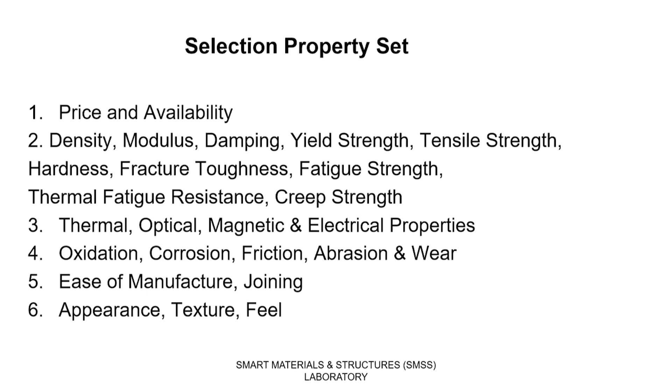Every product is going to interact with the environment for which it is designed, which means there are chances of oxidation, corrosion, friction, abrasion and wear. So we have to choose materials such that these interactions with nature, or these kinds of abrasive forces that work on a product because of natural forces, can be minimized.

And then of course, when we have to make a product, we have to think of the manufacturing process. So the ease of manufacture and joining becomes an important factor.

Finally, it is the appearance, the texture, the feel of the product that actually tempts us as a customer to buy a product. So while choosing the material, we have to keep that point also in mind - what is the aesthetic property of a particular material and how it is matching with the product.

So one by one we will go inside the story. The first important point is that we have to be aware of the different classes of materials. The very first important class is metals and alloys, and there the most important group that has been used for centuries is iron and steels - old hand.

Then of course, the ones that are coming up very popular - aluminum and alloys, then copper and alloys, nickel and its alloys, and of course, with biomedical devices and biomechanical applications, prosthetics, as well as for spacecrafts, rockets, etc., titanium and alloys. So this is one major group of materials that we have to consider.

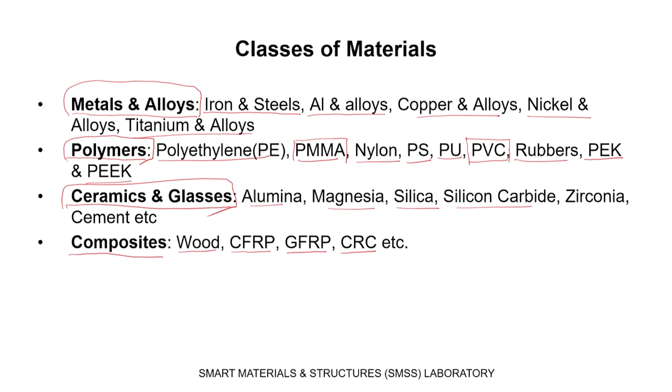So these four groups are the broad classes of materials we have to keep in mind when we select materials for mechanical design. Now, when we talk about the selection process, the first important thing to keep in mind is that, like us, we have many features in our personality. When you write your CV, you put all those features. Like that, every material has certain attributes, what we call characteristic properties: density, strength, cost, etc.

Design, on the other hand, when we are designing a product, demands a profile. That means I need such and such density, let's say low density qualitatively, high strength, less expensive, etc. And I need to look into the materials and select all the materials that match this profile. That is how we start, and then we apply the property limits, because you said low density—how low? Is it between 1000 to 2000 kg per meter cube? If that is so, then immediately steel is ruled out, iron is ruled out. That is how we apply the property limits depending on exactly what is the maximum or minimum permissible property of the system.

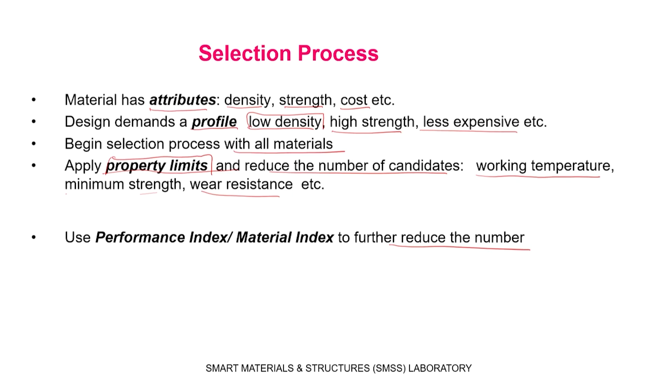So even if we start with a large group of materials, this will help us reduce the number of candidates. There are typical properties generally applied, like working temperature, strength, wear resistance, etc. Finally, we will utilize the performance index or material index to further reduce the number to one or two. That is the trick we will learn today. But before that, I also want to show you how complex the selection of material process can be.

Just consider one material I told you is very popular today: aluminum and its alloys. Aluminum and its alloys actually have 7 to 8 series. For example, the 1000 series, which is nothing but pure aluminum, 99% pure. They are ductile and generally used as electricity conductors or as foils, like the aluminum foil we utilize. On the other hand, the 2000 series aluminum has a percentage of copper mixed with it; it is much stronger than pure aluminum and is used in aircraft skin, rivets, etc.

If you go for the 3000 series, that generally comes with the mixing of manganese. Manganese gives it corrosion resistance, so it is used for roofing sheets, cooking pans, etc. If you go for the 5000 series, that is aluminum plus magnesium, and magnesium gives it even more strength than copper.

So, it is used in pressure vessels. Then if you go for 6000 series, you get not only aluminum and magnesium, but also silicon. So, it is used in stronger applications like window frames, age hardened products, etc. 7000 series again gives you strength, age hardening, and all these things together, that is with the zinc.

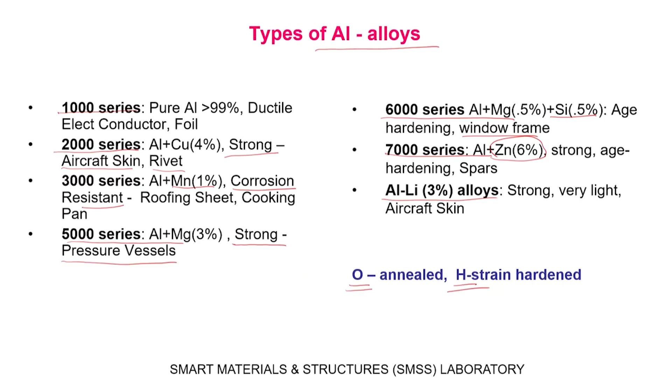So, let us say that I have to choose a particular variety of aluminum for automobiles. We know that a light automobile is something that we always look for. So, how do we choose it?

Well, first of all, I choose a material because it is for a product. Then which family do I have to choose? Ceramics, glasses, metals, polymers, elastomers, composites. We apply the property limit, and then we naturally see that the strength requirement and all these things will keep the metals and the composites as two candidates.

But composites, till today, other than aircraft applications, are very expensive for automobiles. So, except certain parts of a racing car, we normally do not go for composites. So, we will keep ourselves in the metallic domain, and as we are looking for lighter density, lighter automobile, out of all the possibilities of the classes of metals, we would be ready to take aluminum alloys.

Now, as I just told you, aluminum has all these varieties in it. The variety that we will go for is the 5000 variety. Why? Because it is the 5000 variety which can be used in terms of a thinner skin and also has better corrosional properties, and it has good strength.

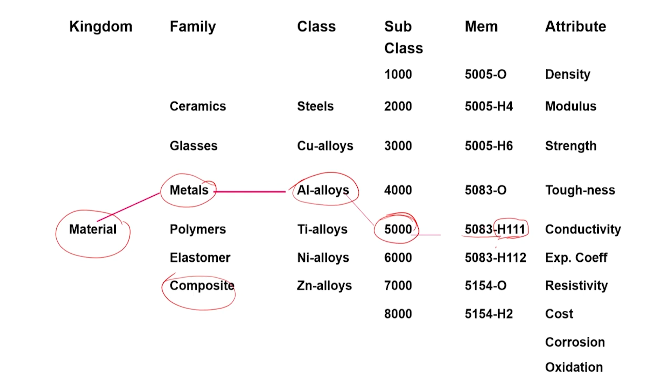In terms of the choice of material, this becomes the final choice. So, this is just to tell you that considering all these attributes that I have given here, one can come to the conclusion that for automobiles, one of the best choices is 5083 H111.

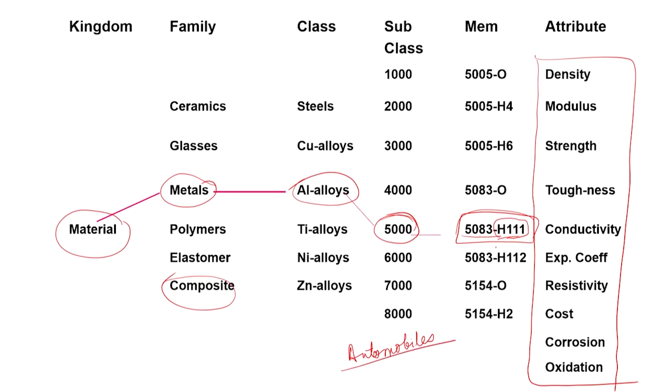Now, let us see what is the process by which we can do this entire thing in a very rational manner. Well, the first important thing is that whenever we design any structural element for a product, it will involve minimization or maximization of an index, and this index property is a function of three things: F is the functional requirement, G is the geometric requirement, and M is the material requirement.

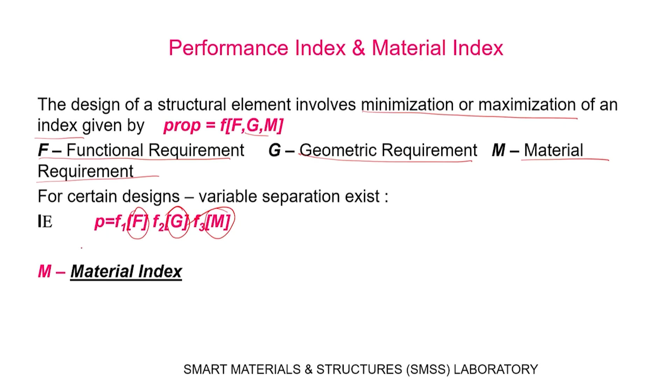And for certain designs, luckily not for all designs, towards the end I will show you how these things can get coupled, but for certain designs, luckily, the separation exists. That means you can consider the functional properties separately, geometric properties separately, and material property index separately. Now, for material choice, we will go for this material index specifically. So, let us see how we can do that further.

I will first give you a very simple example. The example is for a light stiff tie. What is a light stiff tie? Well, what is a tie? Tie is not the same tie that we put in a knot.

In terms of a structural engineer, a tie member is something which is always designed to carry the tensile load, so there is tensile force. So, if I take this member and make sure that I am only pulling it always, then this becomes a tie member. So, let us say I am trying to design a tie member, but it has to be stiff. What does that mean as stiff?

It must have a very high modulus of elasticity, and also it has to be light, meaning it must have a very low density. So that is what we are looking for.

So what is the mass of the tie? M is area of cross section, length and density, product of the three. We need to minimize this mass, that is my performance index. In order to get a light stiff tie, we need to minimize the mass.

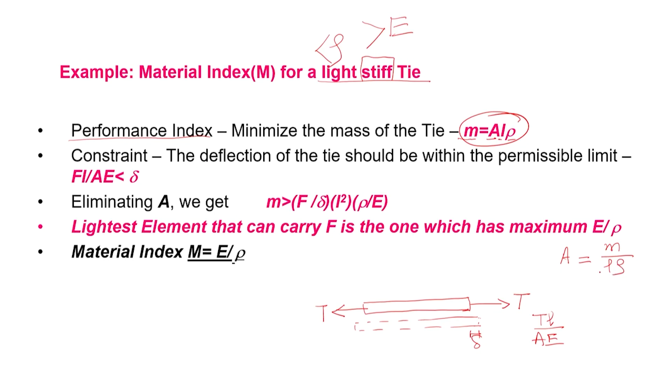So that means area from this relationship can be written as M by L rho - area is that free variable. Now I also know that delta is given to us. So delta is T L by A E, and delta is fixed for us. So what is the area then in terms of delta? It is nothing but T L by E delta.

So now if I write it in this relationship, what do I get? T L by E delta would become equal to M by rho L, that is M by L rho. So I can write this now as: the mass is T L square rho by E delta.

And I can write this in terms of 3 different sets. This T by delta is something we can consider separately as one group - that is the functional group. Then we can write L square as the geometry group, and rho over E as the last group, which is the material property group.

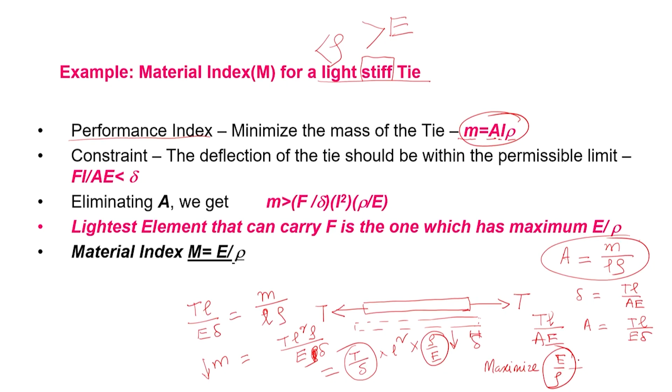So if I have to minimize the mass, what does that mean? It means I have to minimize rho over E, and that means you have to maximize E by rho, because maximization of E by rho is the same as minimization of rho by E. So this example tells us how to figure out the material property index. In this case, it is M is E over rho. Now this is provided you consider area as the free variable.

Now for a beam which can take bending moment, not a tie, this would become square root of E by rho if you consider area only as a free variable. It will become E to the power of 1/3 over rho if you consider height - it will become E by rho. Similarly, from the strength point of view, a material property index is sigma f to the 3/2 divided by rho. And if I consider a column member, then it is C M A L rho, and the material property index correspondingly is square root of E over Cm rho.

So you can actually find out similar material property indices corresponding to every application, and we can use a book - Ashby's book, Material Selection for Mechanical Design - very effectively.

Even if we do not have all the ideas of mechanical engineering, we can still use this effectively for material selection for mechanical design. There is also software available, but even otherwise the book itself is very helpful.

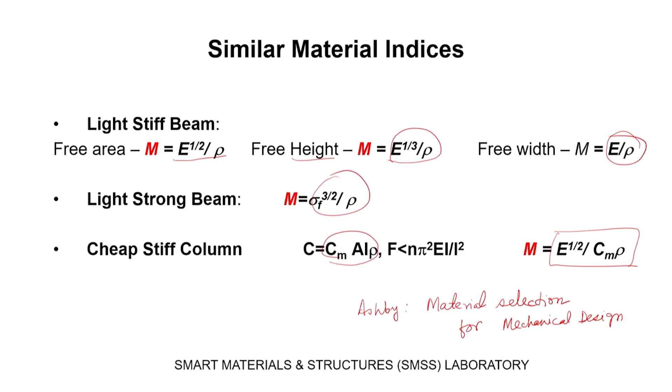Now, let us take some case studies. First case study is related to our aluminum alloy vehicle body material selection. Let us look into this case study.

By the way, this is one of the designs that our students developed for automobiles which can be parked one against the other. Now, one important thing in automobile design we have to keep in mind is that way back in 1975, there was a CAFE regulation that actually restricts fuel emission from the obnoxious emissions and pollution point of view, from 14 mpg to 28 mpg between 1974 to 1987, and the CAFE limit remains 27.5.

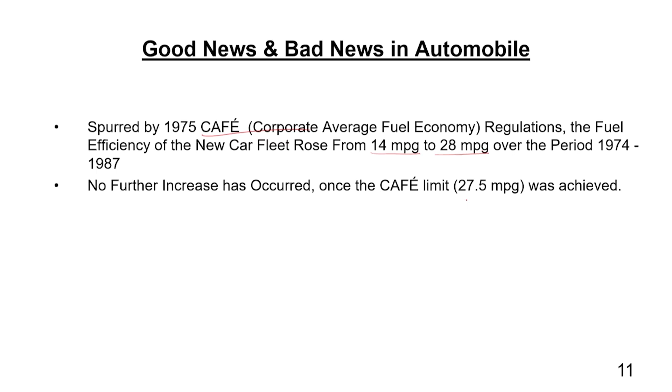So every automobile is to be designed such that you have a good powertrain for efficient power transmission. You have to select the material of the car body such that it is lightweight, such as aluminum alloy, with the most efficient design, carrying out some structural optimization, and fuels with less noxious exhaust. There was also a shift to make smaller cars. That is how the fuel economy was achieved.

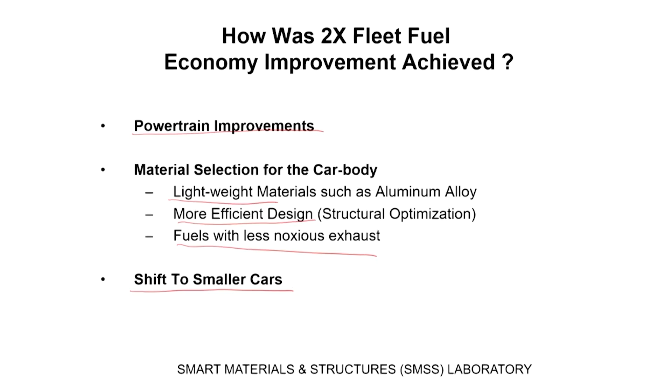Now, if I look at this from a material index point of view, let us take a flat panel. If I take a circular panel, then I can write the mass as pi a squared t rho, where 2a is the diameter of the panel.

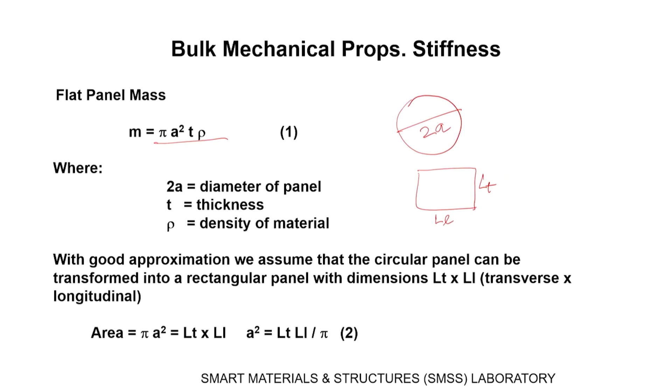The question now will be, what is the deflection? This is why we had chosen a circular panel, for which a nice closed form relationship exists that gives us the deflection with respect to the force.

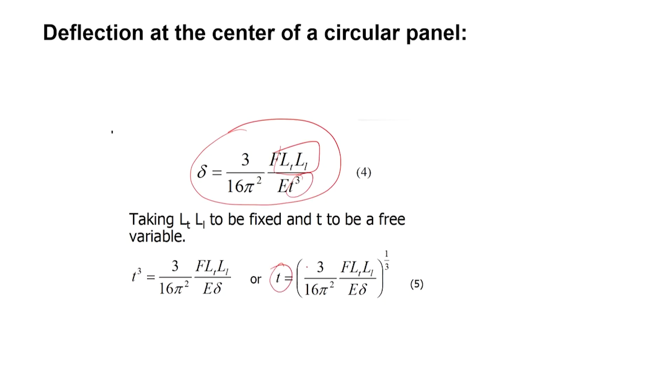Now, LT and LL, the size of the panel, is actually fixed. So I can express the only free variable, thickness, in terms of all the other parameters. And if I express thickness in terms of all the other parameters, then I can rewrite the mass of the system.

And then, exactly as we did for that simple tie case, I can divide this entire thing into three parts, out of which this part is functional. We already know this is functional, this is geometry, and this is the material property index, M, which is what in this case?

It is not E by rho, or the square root of E by rho, but it is E to the power 1/3 over rho. So that means in order to minimize the mass, you have to minimize rho over E to the power 1/3, which is equivalent to maximizing E to the power 1/3 over rho. That is the way we generally keep the density in the denominator - this is just a matter of convention. So this is the way you need to minimize.

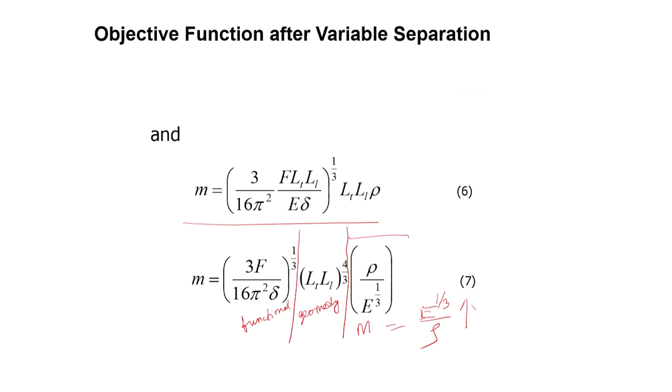Now, if I look at all the typical materials that we can utilize for car making - steel, concrete, aluminum, all of them - and check their E to the power 1/3 over rho, the first thing you will see is that CFRP is the best, and no wonder, that is why it is used for racing cars, I told you. But it is very, very expensive. So what is the next best?

Well, next best, if I look at it, GFRP, wood is there, but wood today is not utilized at all. PU also has other problems, so you can cross this out. Wood is not good from a mass manufacturing point of view. So glass, no, it is bad in terms of compressive strength - bad in compression. So we cannot utilize it.

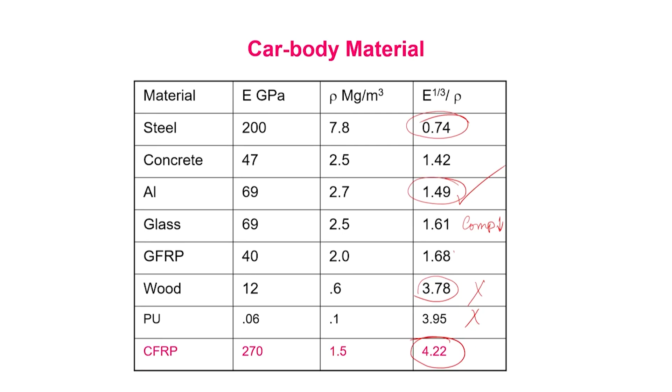Now we can see that aluminum and steel are the two competitors, and out of this, aluminum is a better choice. In fact, we can actually get an Ashby chart like this, and in this chart right now we are looking at only... Ashby chart can be multi-dimensional.

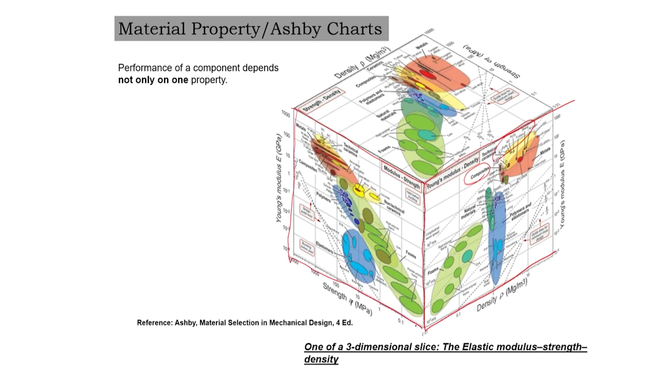I have only shown you the 3 part of it, that is E versus density, with E to the power 1/3 over rho as the slope of this line. You should be able to see what materials give low density on one hand and high modulus on the other, and you will see composites are always one group, and some metallic alloys also work well there. Similarly to E versus density, you can also have strength versus density, or E versus strength if that becomes your most important criterion.

Now let us quickly look into another example. This is the example of a flywheel. Flywheels are utilized for storage of kinetic energy, so flywheels are like electromechanical batteries for us, storing energy in a rotating mass.

A motor connected to the flywheel will start the rotor spinning - we can say it is charging - and when it is spinning and the wind has picked up, it will turn the motor, which is the discharging part of it.

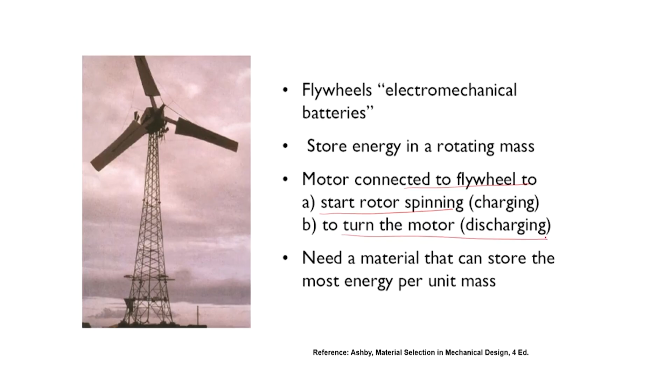Now let us say I need a material that can store the most kinetic energy per unit mass. What is the kinetic energy? Similar to half mv square, it is half I omega square, and I can find out the expression for it. Then, what is the kinetic energy per unit mass for a circular system? It becomes half omega square r square.

Now we have constraints here. What are the constraints? A flywheel cannot arbitrarily rotate at very high speed, because in order to have better efficiency the omega can be increased, but then it is going to disintegrate. Cost should be within reason, and the fracture toughness should be adequate - GC should be adequate.

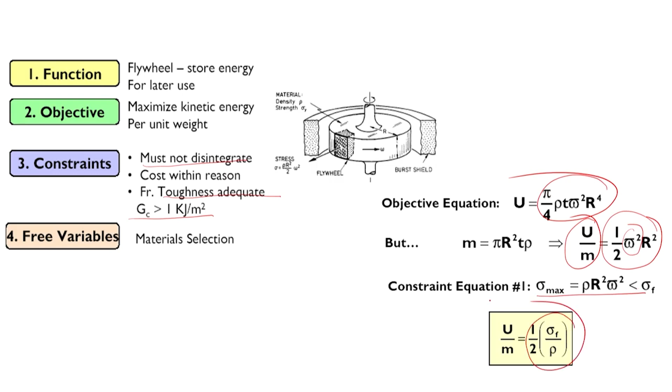So if it is only U by M that I need to figure out, and if strength is the only criteria, it would become half sigma f over rho as one of the criteria. But we have fracture toughness as our concern, which is related to the stress intensity, and this is the expression of the strain energy release rate GC, which we use for measuring fracture toughness.

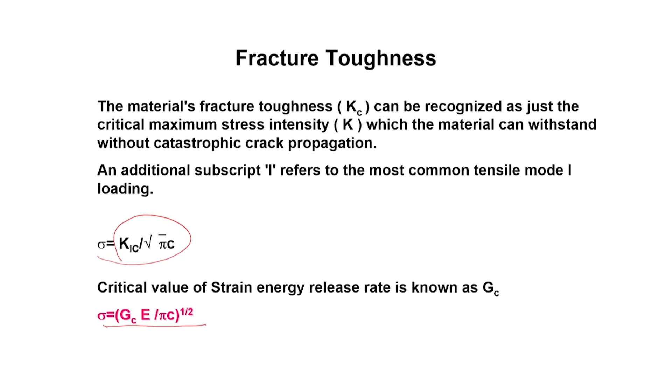GC can, using these last two equations, be expressed in terms of KIC as one of the properties in mode 1 fracture - KIC square over E - which has to be greater than 1 kilojoule per square meter. That is our requirement, the property level.

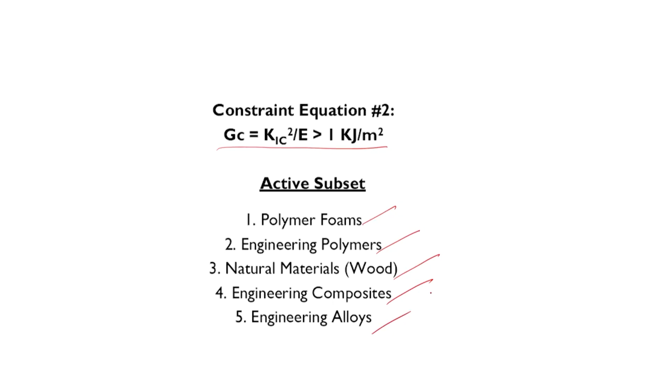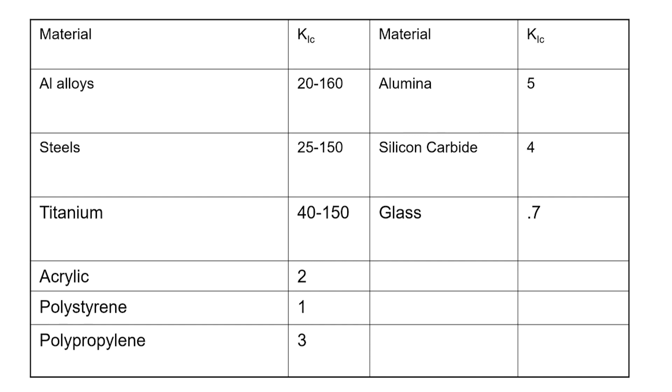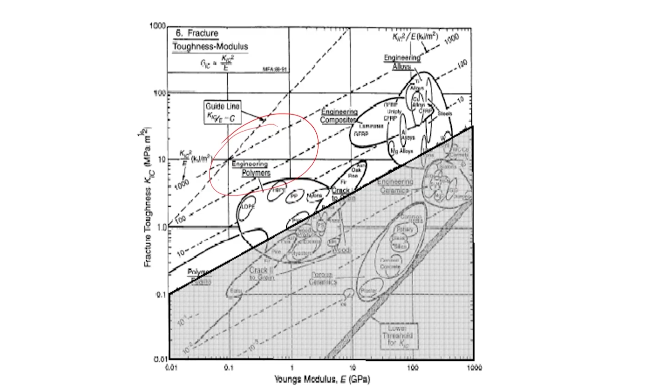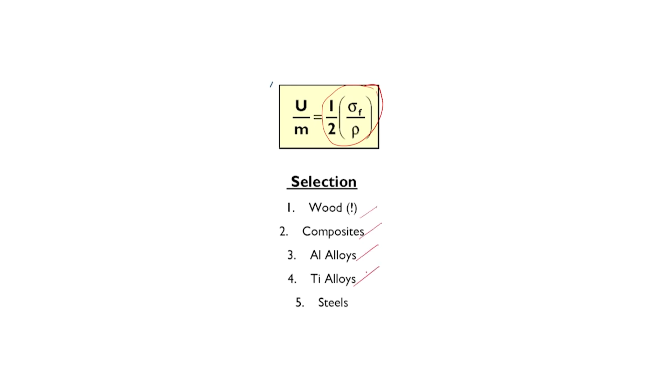Now let us look into our criteria after applying this: sigma f over rho. From the selection point of view, wood, composite, aluminum alloy, titanium alloy and steel would come into our active set. So you can have a sigma f over rho plot, and you can see the maximum of sigma f over rho - that is minimum rho and maximum sigma f - again comes here with engineering composites, and all our choices are above this limit. So we have all these limits with us, using which we can actually choose the material.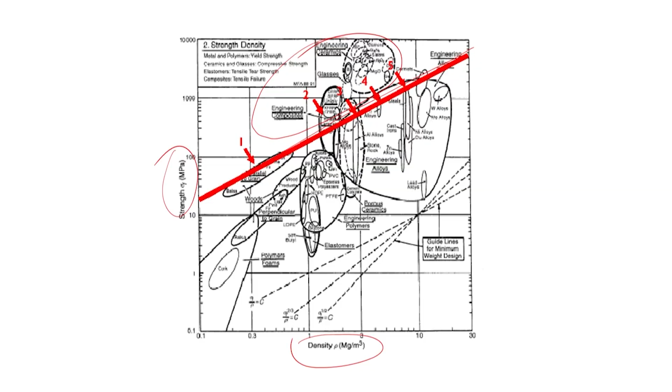This is where we will close our discussion today. In the next class, we will take one more example of how to select the material for other applications. We will do some case studies so that you will be able to know how to select the material for different cases. Thank you.